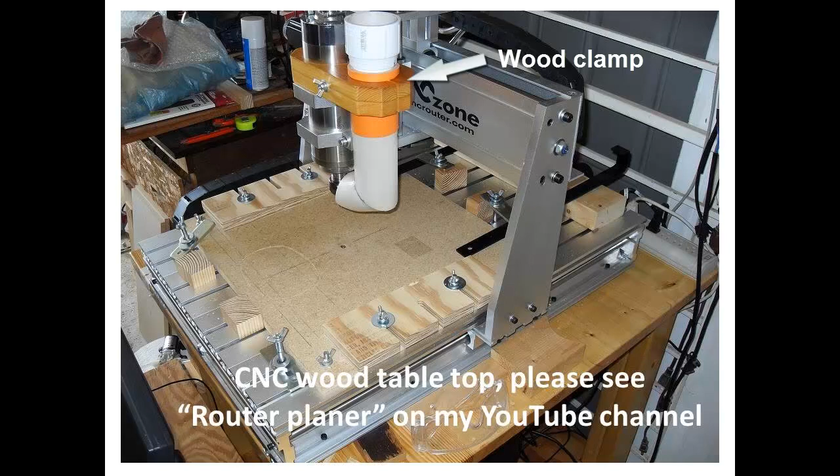This 6040 CNC was purchased 2 years ago and it has been running without a problem. Easy, simple and straightforward to assemble. Next to the ER20 collet, a wood clamp holds a vacuum nozzle to pick up more or less 90% of the wood dust. The CNC sits on a stable and sturdy surface.

Under the CNC is the VFD and PC that drive the CNC with the help of Mach 3. When I purchased Mach 3, I was a little lost and did not know how to make it work, but thanks to the other YouTubers I found the UC100. The UC100 people were very helpful.

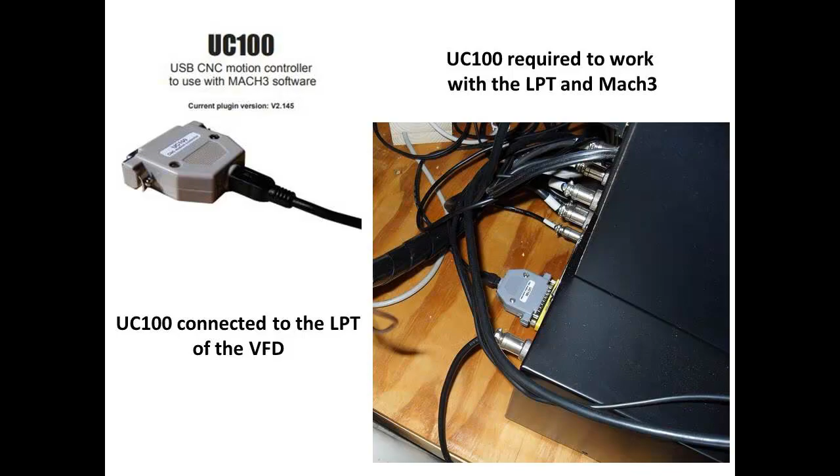The CNC manufacturer sent a good explanation how to program Mach 3. As a beginner, I still was a little lost, so I contacted UC100. Oh man, these people are very helpful, and finally my CNC was working correctly. This water pump is a very noisy puppy, but it works well.

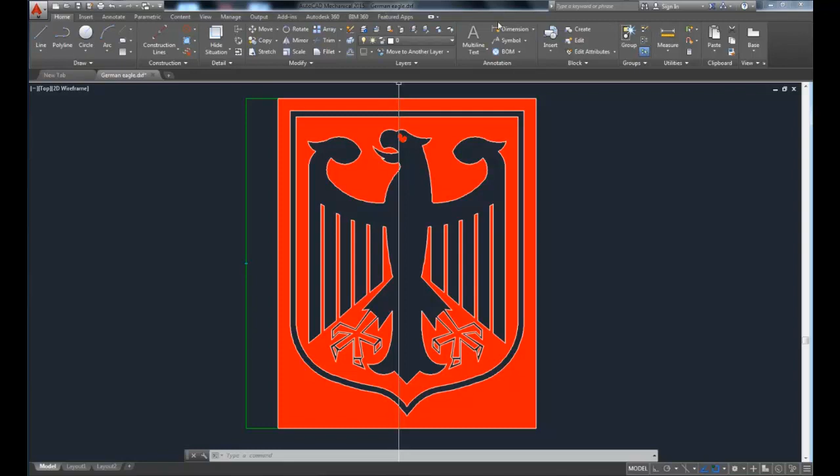I transferred the German Eagle from the internet and traced it in AutoCAD using lines, arcs and circles. Don't use splines. And hatch the areas that needed cleaning. It means removing material. The hatching helps us to see how the eagle is going to look, and then we can save it as a DXF.

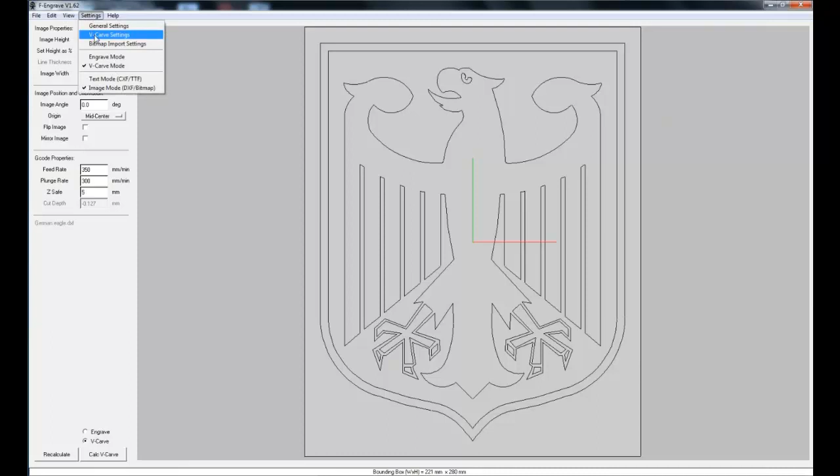I discovered F-engrave thanks to other YouTubers. Transferred the eagle as a DXF to F-engrave, and as a starting point I selected the center of the image. You can set the height, the image center and the feed rate. Go to settings and enter your tool dimensions.

Click VCarve and F-engrave will let you know if your drawing has problems like interrupted, overlapping lines, etc. by showing you an irregular shape where the problem is. This is a capable software and generates a G-code for milling. On Mach 3 you center your pattern and set the CNC to 0.

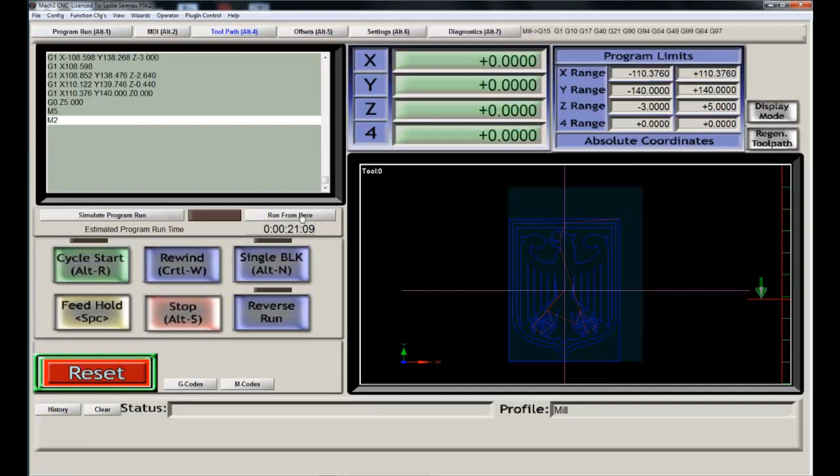You go to Toolpaths and Simulate Program Run. In this case, it will show you 21 minutes. Go to Program Run and start the CNC. And don't forget to rewind. On Toolpaths it shows you the progress of the tool. The green arrow indicates the Z axis.

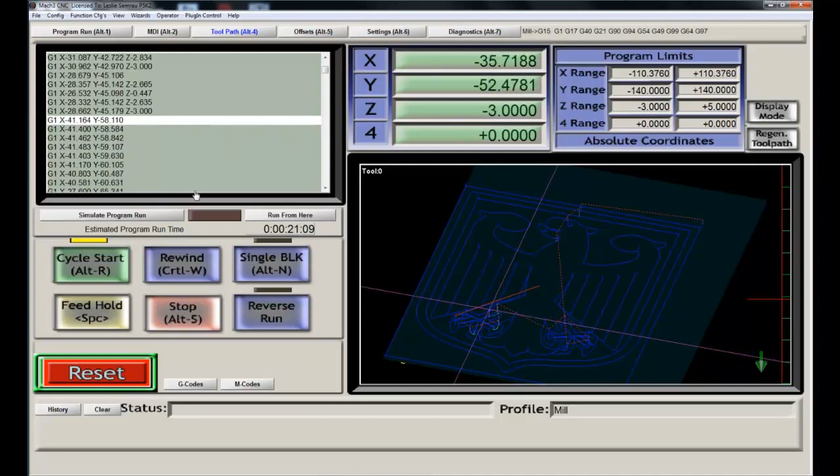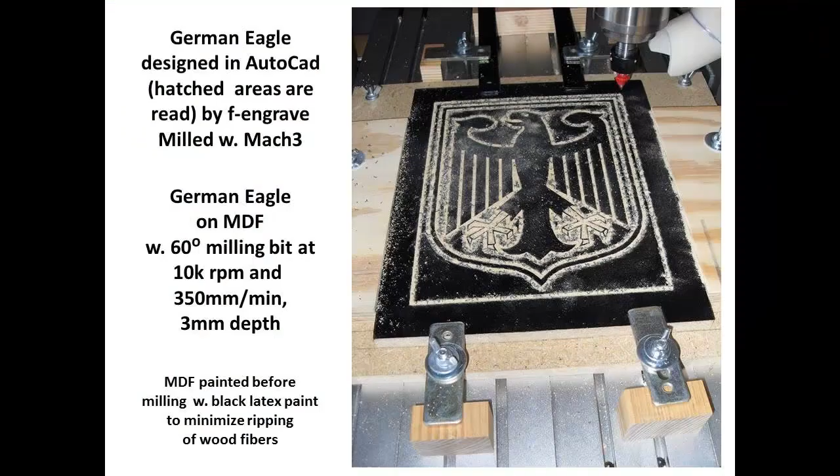I'm not going to record the whole length so that the video turns a little bit shorter. I did not take a video during the making of the eagle. Sorry about that. The milling of the German eagle is ready, and a 60-degree milling bit at 10,000 RPM and 350 millimeters per minute and 3 millimeters depth were used.

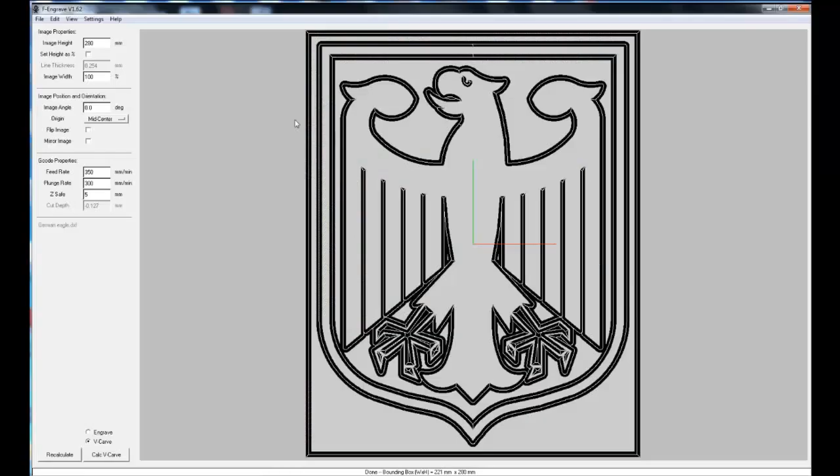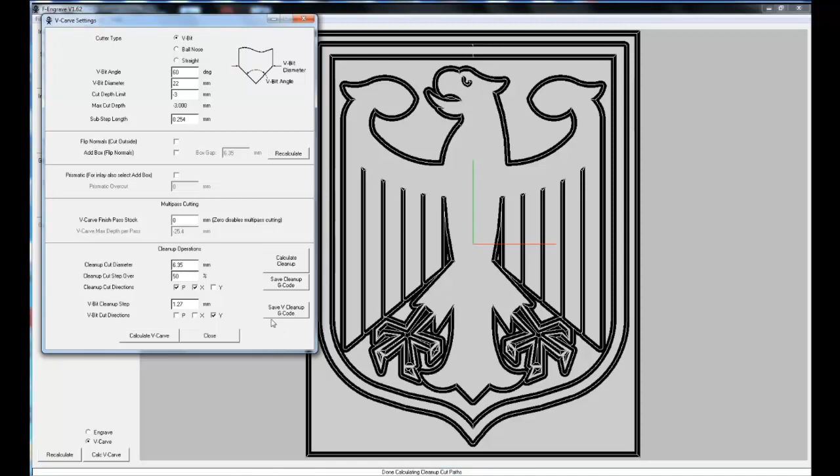We go back to F-engrave and now we calculate the cleaning. That means the hatched areas around the eagle, with the 1/4 of an inch straight milling bit at 15,000 RPM and 350 millimeters feed and 3 millimeters depth, and an overlap of 50%. Parallel to the x-axis, and click Calculate Cleanup.

The yellow strip below indicates that the program is working. The red lines show the cleaning bit path. Small areas are left untouched because the milling bit diameter is too large to access these areas.

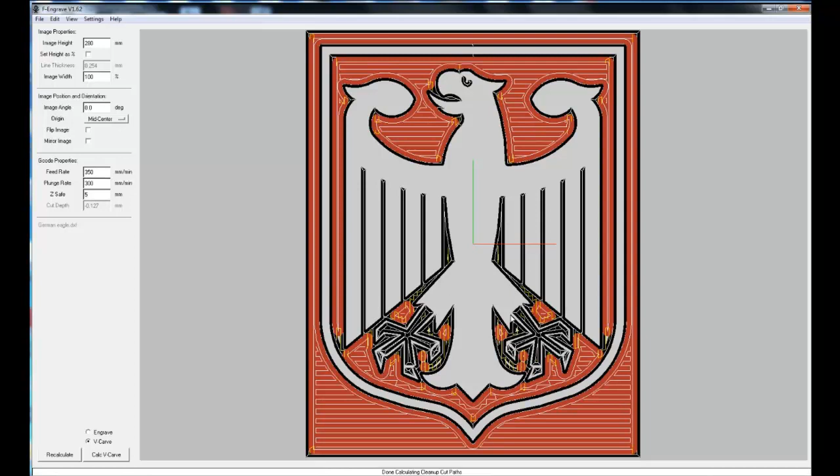We load the cleaning in Mach 3, set the new tool and coordinates to 0, go to tool path and calculate the cleaning, and see that it is almost 20 minutes here. We rewind and start the cycle in the tool path, and we can see how the tool is cleaning the eagle.

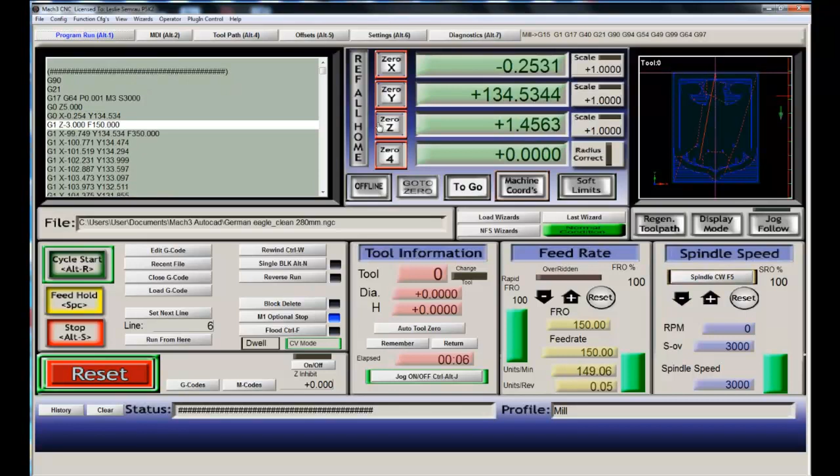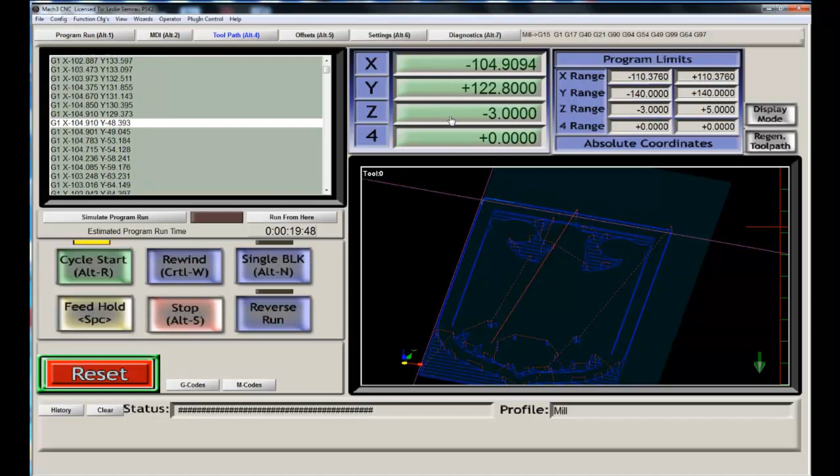We go to tool path and notice the green arrow simulating the up and down tool movement. The coordinates show where the spindle is cleaning the eagle. We are going to make it a little bit shorter, so we will stop Mach 3 to avoid again a lengthy video.

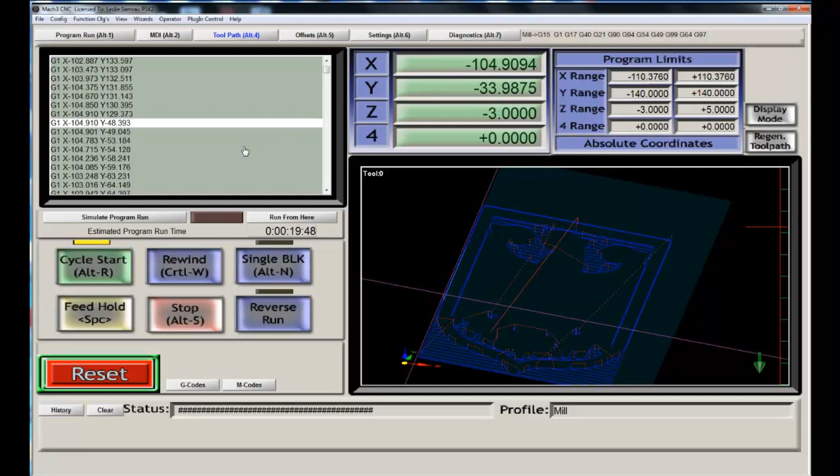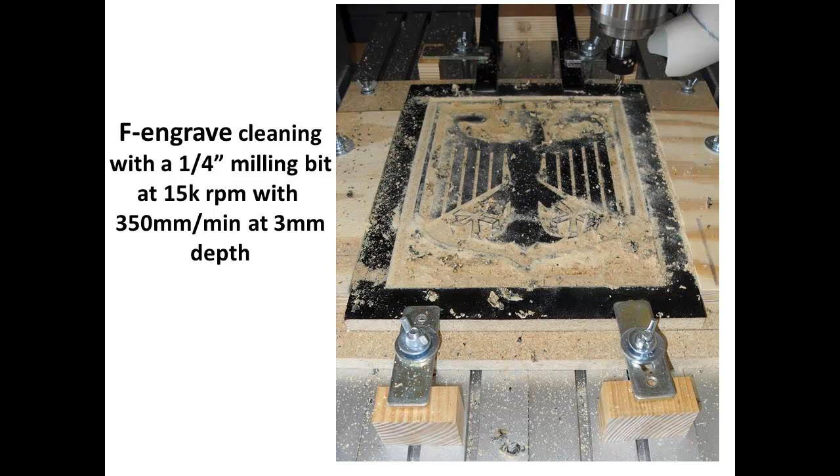Once the milling and cleaning were ready, I had to do some cleaning with a wood chisel because MDF sometimes does not clean very well. And you see there's a little bit of gunky material on top of the eagle. After the cleaning and repainting where the MDF fibers ripped, I proceeded to apply polyurethane to give it a little sealing and a better appearance, and now the eagle is ready.